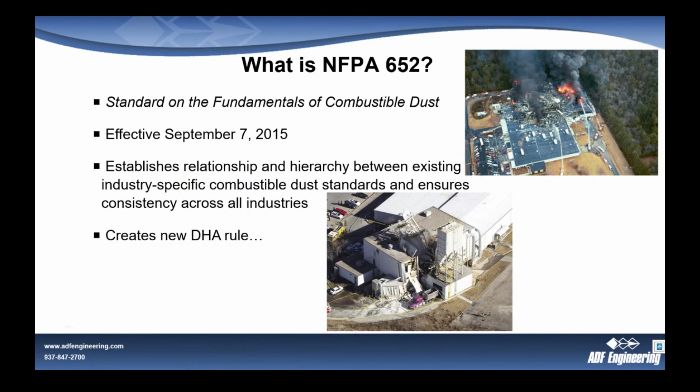OSHA has not formally adopted 652 as code. However, they did implement a national emphasis program back in 2007 that was targeted primarily at grain milling, but it has since been applied to other industries. It allows them to perform random inspections of facilities and implement heavy fines for non-compliance. The standard they've been following has been NFPA 652, and as was its intent, OSHA has in fact been issuing fines and citations, fairly sizable citations, for non-compliance with this regulation. Although they haven't adopted it as a code, they are using the general duty clause, which allows them to do that.

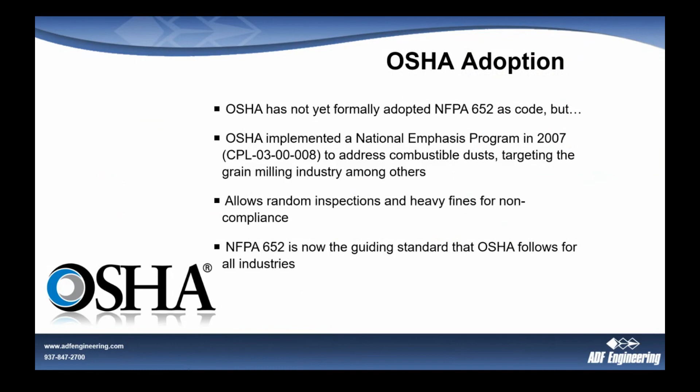So some of the key standards, particularly in the food and feed industries, NFPA 61 is what that industry has largely followed. That standard has since been modified to reflect back NFPA 652 and its requirements, and they've been consolidated somewhat. The other key standard, 654, is the catch-all standard for a variety of industries not covered under the other standards. 68 and 69 are two of the standards that involve sizing of equipment and requirements for explosion prevention systems.

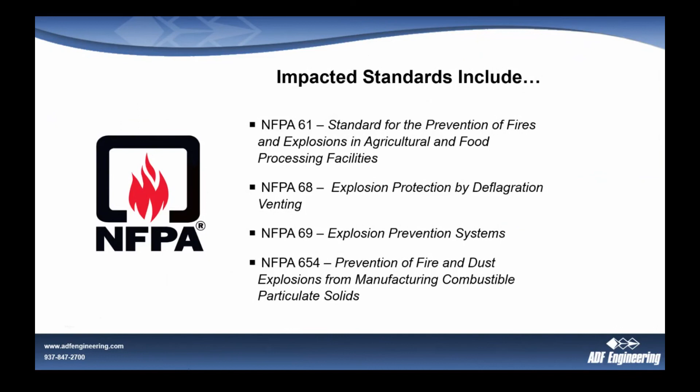So the dust hazard analysis, this is what's really new. What is a dust hazard analysis? This is similar to the process hazard analysis that was developed from OSHA's PSM program, which was found to be very successful. The regulations are intended to copy that success, and the DHA was developed with intent to be very similar to that process. However, there are quite a few differences, some fairly subtle. Once you start conducting a DHA, if you've been through a PHA, you can quickly tell where the differences are.

The key thing here is that this is required for all facilities that generate, process, handle, or store combustible dusts. That includes all grain elevators, corn milling plants, oil seed plants, but also plastics, places where combustible metals may be handled, such as a 3D printing facility dealing with metals. It also deals with woodworking facilities. So this is quite a comprehensive standard.

It is retroactive in the requirement for the DHA. So regardless of the age of your facility, you are required to have a DHA. Now keep in mind, a DHA is just the analysis. It is a document, not the implementation of that document. So other components may be grandfathered, but having the DHA is a requirement.

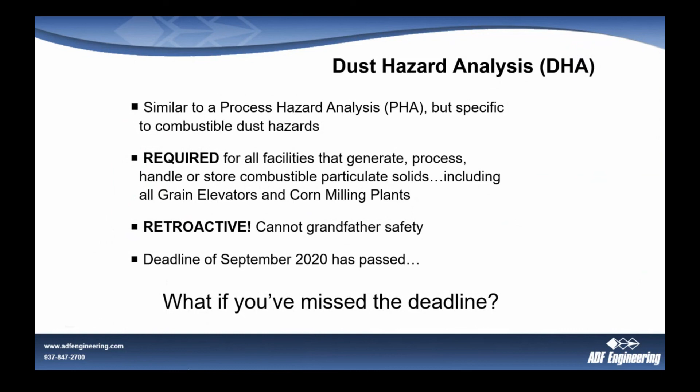This is the main concern. You still have time. You still need to develop that dust hazard analysis. Just keep in mind, if something happens in your facility that brings OSHA into your plant, or if OSHA decides to audit your facility for whatever reason, they can fine you. They can issue a citation now, and we have seen what they have issued in terms of citations — these can be significant. They will issue you a citation and essentially tell you to put together that dust hazard analysis. They will not necessarily shut down your plant unless they find an imminent concern, but they will cite you regardless.

So a dust hazard analysis includes combustible dust data for all of the combustible dusts that you have on your site. I'll be going through each one of these criteria and what they mean. You need to identify the potential areas of risk within your facility, identify the credible ignition sources, mechanisms for suspension of dusts, and safe operating ranges in your facility. What existing protection methods do you have in place today? Determination of the adequacy of that existing protection, and what explosion propagation hazards exist — that is, are there open paths from one piece of equipment to another where a dust explosion can spread. At the end of the DHA, you'll develop additional recommendations for protection, further measures for protection, and an implementation plan.

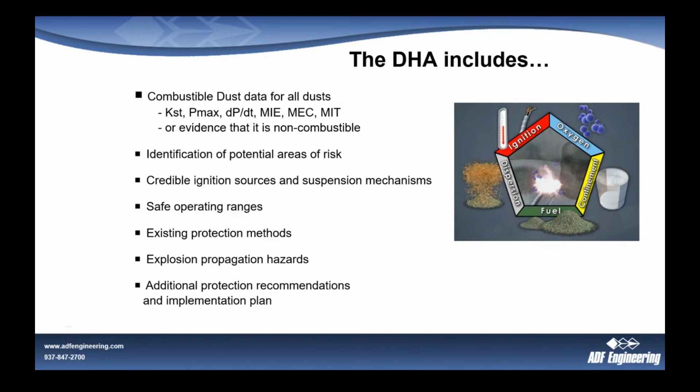So the first step in this process is to define what you have. NFPA 652 is very, very specific about this part. It's clear that you're required to understand what the hazards are in your facility, communicate that with operations, maintenance, and those located on the facility, and begin by defining the dust hazards that you have. Even if you don't believe you have combustible dust in your facility — and many dusts are not combustible, salts generally are not combustible, most minerals are not combustible — you still need to document that, and it still needs to be communicated.

But for the dusts that are combustible, and this generally applies to all organic dusts as well as most metal dusts, you need to define those dusts. You need to identify their sources, what types of dust you have, and focus on those primary hazards — the ones with smaller particle size and less moisture. That tends to lead to a more combustible material.

You need to do sampling and testing. If you are bringing in a raw material that is a combustible dust, your supplier is on the hook for providing you with the combustibility data for that material, unless you are changing it. As soon as you process that raw material, whether it's raw corn or soybeans or whatever it may be, if you are changing it, now it's your dust — it's no longer your supplier's dust. Once it is your dust, it is your responsibility to sample that, have it tested, and determine that combustibility data so that you can understand what the hazards are.

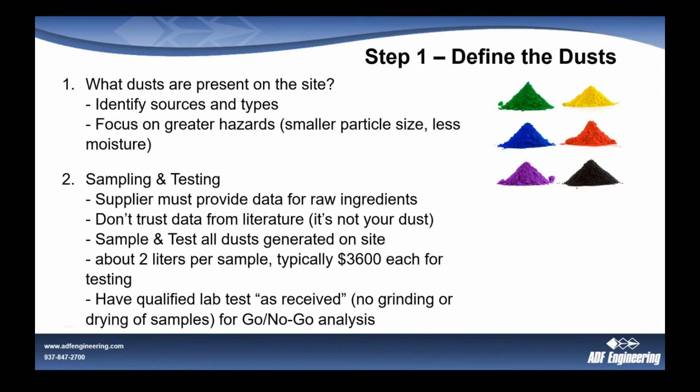But what you need to know is, is it combustible as you are handling it? So you need to do an initial go, no-go analysis. You may very well find out that the material as you're handling it isn't really a dust, so it will not propagate that explosion hazard.

The combustible dust data you get, if you don't specify otherwise, will include three components, these three criteria, the most well-known. Generally when you ask a supplier, is this dust combustible, can you give me your combustibility data, this is what they'll give you. They will give you a KST. They may give you a Pmax.

The KST is a calculated value based on the rate of pressure rise over a given volume. What it really means is the KST is the severity of the explosion that can be developed, how big of a boom does this material make. And Pmax is the maximum pressure that can be developed in an enclosed space over that period of time.

The KST determines the classification and therefore some of the specific requirements for your facility, for your specific dust. But the KST really doesn't paint the whole picture of the hazard. It is used, along with Pmax, in sizing some of that explosion protection equipment, in particular to determine the area of explosion vent panel sizing. Beyond that, that's really all that tells you.

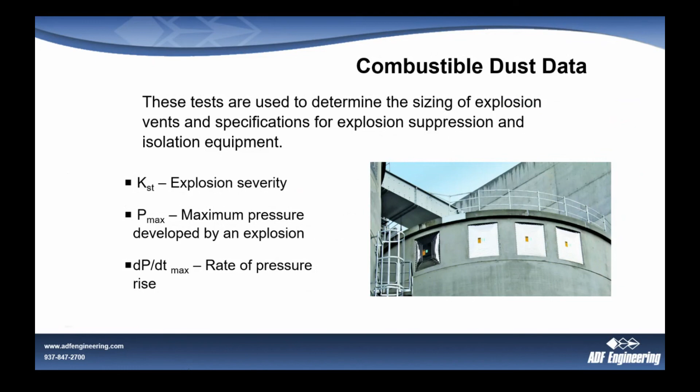There's some more information that you need to gather, so more you need to know. When you are testing your material, also ask for these things. MEC is the minimum explosible concentration. That's going to tell you how much dust is a hazard.

So if you just have a cup full of dust in a great big silo, is that going to be hazardous? Well, not really, because you're not going to be able to reach the minimum explosible concentration. There's just not enough fuel there.

MIE, however, minimum ignition energy, is the measure of the sensitivity of your dust. How easily does it ignite? This is really one of the most important criteria that you need to find out.

So if you only have a KST, you really, really need to get this value as well, the MIE, which in most facilities you'll need to have tested with inductance to determine the sensitivity of your material. This really tells you how easily things can go wrong.

So here's a case where the lower it is, the worse it is. You want a higher number. When you go below 50 millijoules, that means your dust can be ignited by a static spark, from brush static, from equipment, if things are not properly grounded.

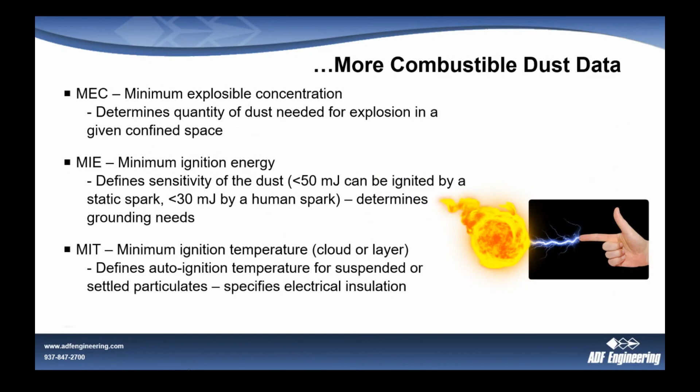So step 2, once you have your combustibility data and you understand how sensitive your dust is, how big of an explosion it can make, the next step is to outline the hazards. This is where you're putting together the DHA itself.

The first thing you need to do is define the nodes for each system. A node is just an area where dust may exist, may be generated, or may leak. Define all of those nodes in your system that contain combustible dusts, and that may include the room itself, where accumulations of dust are occurring.

You need to identify the free paths of travel from one area to the next, and especially identify those areas where your dust can get outside of the equipment, or where an explosion could travel beyond the equipment. A very common area you will come across would be through blowers or fans.

So, for example, in a pneumatic conveying system, when you're running it, the hazard is fairly light, especially if it's a dilute phase pneumatic system, because the amount of material is generally below that minimum explosible concentration. But as you're shutting that system down, it becomes an issue of concern in that transition period when you're starting it up or shutting it down.

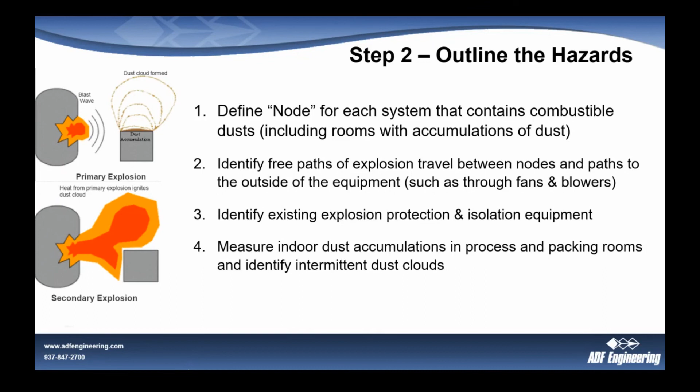As you conduct the DHA, the participants need to include representation from operations, from maintenance, site engineering, and of course site safety needs to be involved as well, along with someone who offers some expertise in this area of combustible dusts. So you need to have that competent person available during this thing.

Review each node for the likelihood, the potential for ignition sources, and so on. Document the recommendations for mitigation of potential explosions and their potential to spread to secondary explosions.

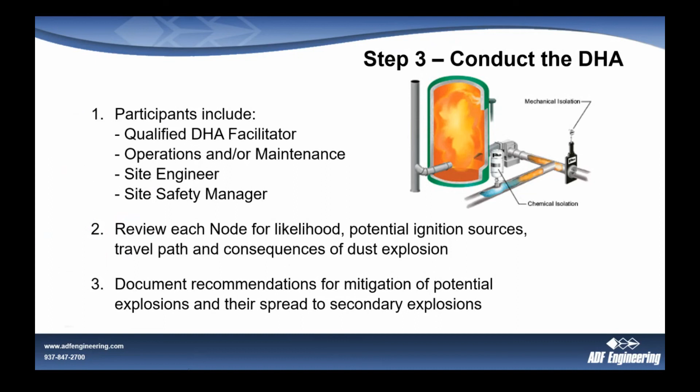Here is just an example. I know this is an eye chart that probably none of you can read. That's okay - this is just to demonstrate what a typical dust hazard analysis chart looks like as we're assembling it.

The key thing there is that central column, which is the likelihood. If you're familiar with running PHAs, you typically have 3 columns: severity, likelihood, and detectability. However, what you find in a dust hazard analysis is that your severity and your detectability will wash out - it's the same hazard you're looking at again and again.

It really boils down to the likelihood of obtaining all 5 parts of the explosion pentagon that could be developed into an explosion. So that becomes the key criteria.

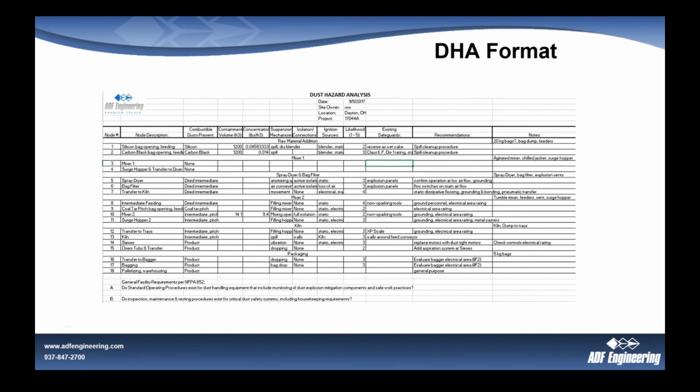In the next step, the implementation plan, you need to develop a written plan to address your combustible dust risks. That needs to have a schedule and a responsible person. That is what OSHA is looking for.

They want to know that after you've conducted your DHA, what is your plan? When are you going to execute it? And who is responsible for it? That's what they're going to hold you to. Once you have a DHA, it's this implementation plan with schedule and responsibility that they hold you accountable for.

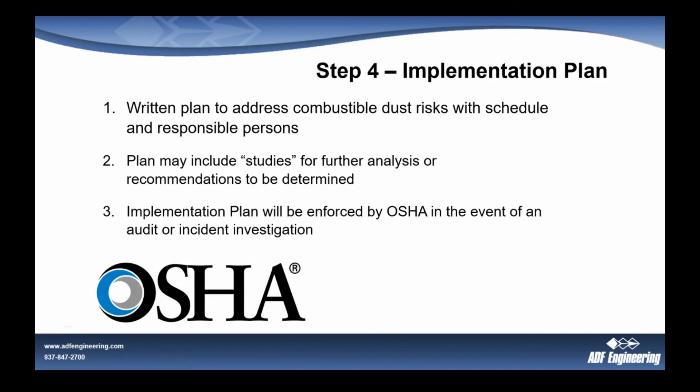That plan, however, may include further studies. You don't have to solve all of the world's problems while conducting your DHA. You may opt to say we will evaluate this further, or we will do a study, but you still need to have a schedule to conduct that study. You need to have a person responsible to go and do that additional study, that additional evaluation. But that is what is then enforced.

As you develop an implementation strategy for an existing facility, you need to do this engineering review. This is where you need to have an engineer involved to look at those high-risk areas and help you come up with the best options for compliance, because there's almost always more than one way that you can implement this kind of redesign. Some ways may be easier to run than others, but others may be lower capital. Typically you're looking for the least expensive option from a capital standpoint.

That's not always the best option, but those things need to be weighed against each other. One key thing is that you'll find, for example, explosion relief pressure, known as Pred, can be reduced by combining a few options. Sometimes you need to look at the combination of things like explosion venting and suppression, which are generally implemented one or the other, but there you can have that combination. So there may be some lower cost options that can be engineered.

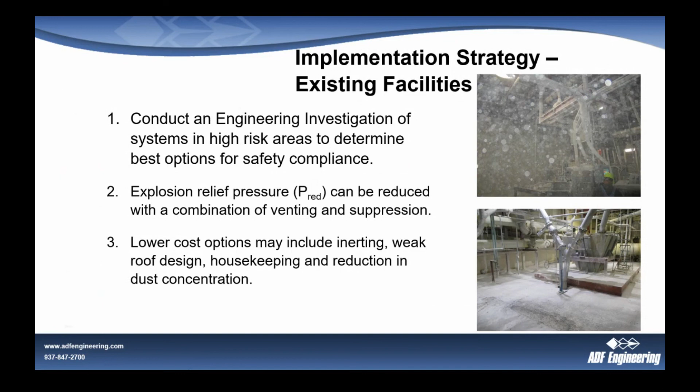Because it's these accumulations that become the large secondary explosions. When something happens inside of a piece of equipment, it reaches this pile of material that gets raised into the air by the first explosion, becomes a devastating secondary explosion, which knocks down the walls and brings down the roof. You can't allow that to happen.

So in the final step of this, you need to implement your solutions. NFPA 69 is very valuable for this. There's a lot of information about what you can and cannot do in NFPA 69, but it does allow quite a bit of flexibility as well. It outlines a number of options that you may have.

Typical solutions, of course, include chemical suppression and explosion venting - that's what you see in the pictures here. I will say this, don't be afraid of chemical suppression. It is something that many facilities are just hesitant to implement because the first one that you install is going to come with a control system. The first one will be fairly expensive compared to the rest. So once you've got one, you might as well start putting in more because it's fairly inexpensive then to add on to that.

Explosion venting is perfectly fine especially when your equipment is outside and not in an occupied area. But if your equipment, say a dust collector, is inside or in the middle of the room, explosion venting becomes prohibitive very quickly because you have to be able to vent that outside the room. And you can't do that if your dust collector is located in the middle of the room.

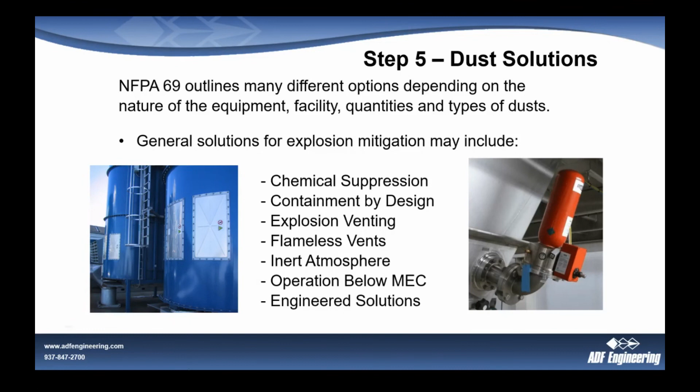So there are many low-cost solutions that can be implemented. If you are outside, something you'll often see is an explosion panel that is directed to an occupied area. To protect that, you can either relocate the dust collector, relocate the panel to another side of the dust collector, or simply add a deflector, which is a fairly simple solution to protect personnel from a dust collector that is outdoors. Indoors, this is still not the way to go. You need to vent that outside.

Make sure that your ductwork is not oversized, and this is another common issue when you're designing a facility, when you think, oh, we're going to design it for future capacity and make our ducts enormous so we can increase our airflow in the future to double the capacity. And then that duct is just too big for your current operating rate. What happens is that dust will begin to accumulate within the ductwork, and now that creates a new hazard.

So other things you can do, passive and chemical isolation, of course, very commonly implemented. And as I mentioned, moving air intakes away from personnel.

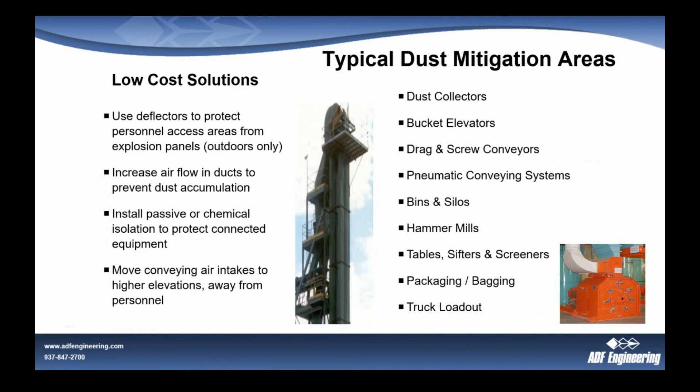Truck loadout is notoriously difficult to maintain dust levels. When you're filling the top of an open top truck and dropping material a fair distance, 8-10 feet of free fall of large quantities of dust into a truck, it can make enormous dust clouds. And what's right in front of that truck but a big hot piece of equipment that runs that truck, the cab, the motor itself. So you need to be very, very careful. And guess what? There's often people there.

First, among dust solutions, we need to talk about isolation. As you know, the secondary explosions are the big ones. The way to avoid those secondary explosions is to keep the sources away from where those secondary accumulations tend to be. If you have an incident in a dust collector, which tends to happen, dust collectors are where these incidents tend to begin. When for whatever reason a small spark hits your dust collector, the dust collector's got everything it needs and it's just waiting on that spark to arrive. Once that spark gets there, you have an explosion in the dust collector. If you can contain it to your dust collector, you will likely be okay. You will lose your dust collector, but you can't allow that to go on to all of the sources feeding that dust collector, because that's when the problems happen.

So you are required to isolate this type of equipment. This applies to dust collectors, bucket elevators, grinders and mills. You need to isolate these. Most often, this is passive isolation around a dust collector. Passive isolation is usually a flap valve that will lock in place once it's activated. A flap valve is essentially a big check valve, that's really all it is. And it's fairly straightforward.

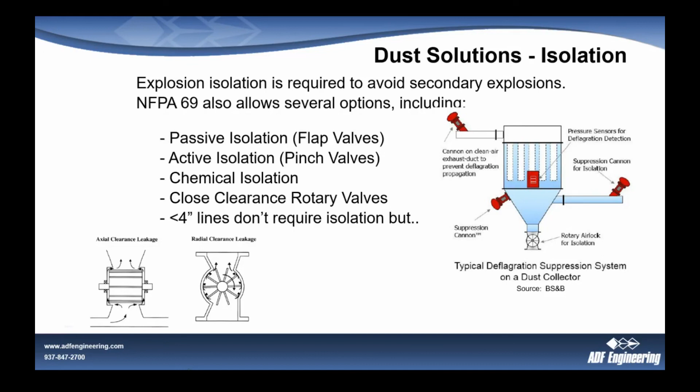Dust collectors in particular are the big area of concern, and this is where OSHA is going to pay attention. They're going to say, take me to your dust collectors. And if they see a central vacuum system collector in the middle of your operating floor, and it doesn't have explosion panels on it, or it's not isolated, and it's larger than 8 cubic feet, guess what? You're going to face a citation.

Ideally, your dust collectors should be located outside. That's because these things tend to blow up and you don't want it in the middle of your room. They're often on the roof. They need to be isolated from their sources because at the other end of that dust collector is a station with an open port where you're drawing the dust in to protect an operator, but that can be the hazard to the operator if an explosion's coming in the other direction. So you need to isolate that, whether it be passive or active. You need to isolate it from its discharge.

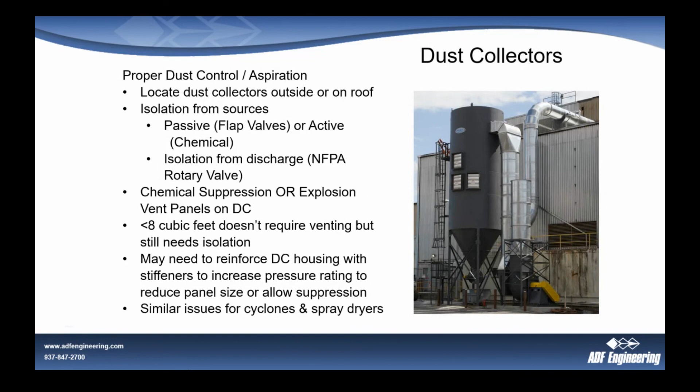Bucket elevators, this is the other big area. You do not have to aspirate every bucket elevator. If you're dealing with certain larger raw materials like corn, you do not necessarily have to aspirate your bucket elevator, but it is still a good idea. If you're handling something like soybean meal, yes, you need to aspirate that piece of equipment.

The best places to put that aspiration, generally you'll need something up at the head section, which is the top, and the boot section down at the bottom. Often the best place to do that for the boot is usually a little bit up, about 3 meters or so from the actual boot. You need to isolate your bucket elevator upstream and downstream, just like with the dust collector. You need to monitor the temperatures. The key thing you're watching for in a bucket elevator is keeping it from overheating. If it overheats, you can set off that explosion.

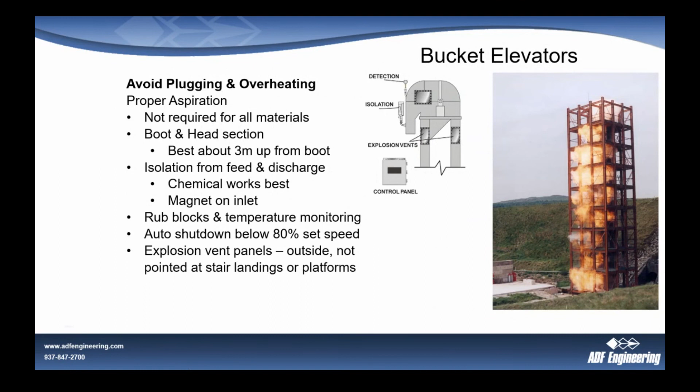They need to shut down if you go below 80% of the set speed of that equipment. The vent panels go generally along the side walls on the top of the bucket elevator, along the upper half generally. Make sure that your vent panels are not pointed at stair landings or platforms. We see that all the time, and OSHA does not like it.

Bins and silos, there's been a lot of discussion amongst the dust safety people in recent months about bins and silos. This is where a lot of incidents continue to occur. Usually the head space in a large silo is too big for suppression to be effective. Aspiration is ineffective. These things, especially concrete silos, don't support the addition of explosion vents. So they're generally designed with weak roofs.

But then to feed those silos, what do you end up doing? You put conveyors on top and people walk around up there. Well, that's no longer an effective emergency vent if someone's standing on it, or if there's conveyors up there. So you need to limit the access to these areas. You need to keep the roof area clean. That's very, very important.

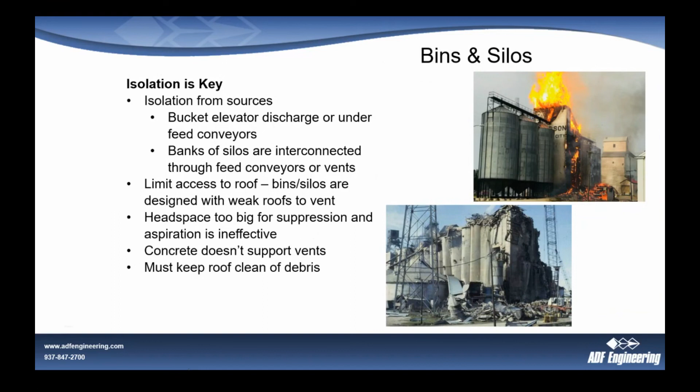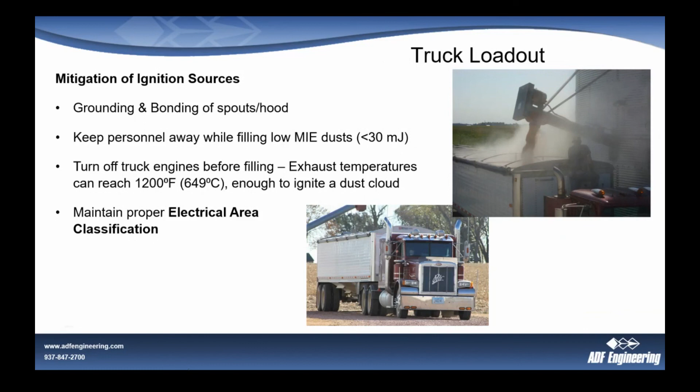Truck loadout, as I've mentioned, is very, very difficult. Make sure you're grounding and bonding the equipment. Keep people away if you're filling a low MIE material. Watch the electrical area classification in the truck loadout area. Make sure the engine is off, because the exhaust pipes of your truck can reach temperatures of 1200 degrees, more than enough to ignite a dust cloud.

There are some nice spout designs out there that you might want to take a look at. The dust-controlled loading spout from Salina Vortex - they make an excellent one.

That's the one with the stacked cups on the right, or the dust suppression hopper from Sioux City Steel, as you see on the left. It's very effective as long as you're loading out the same thing again and again. If you have any variation at all, those tend not to work.

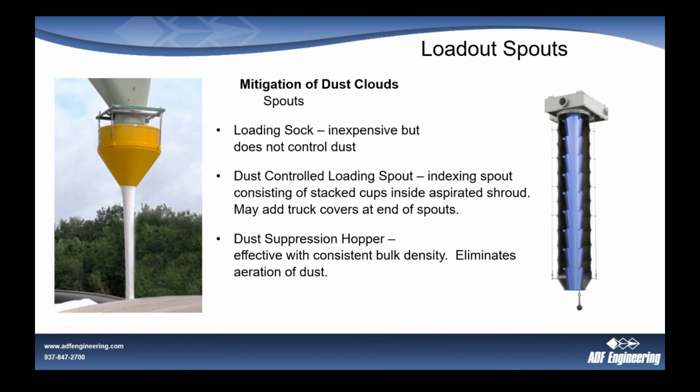Loadout hoods, this is something we do a lot of work with, in particular at ADF. The key thing here is to make sure you're not trying to move your truck, because if you're trying to move it to fill the front and back without multiple spouts, you're really never going to effectively reduce dust accumulation in this area.

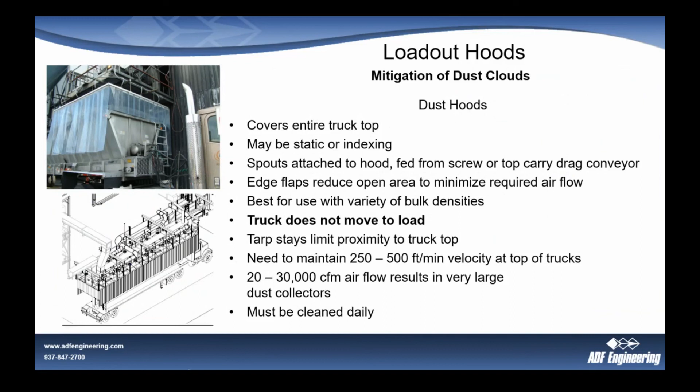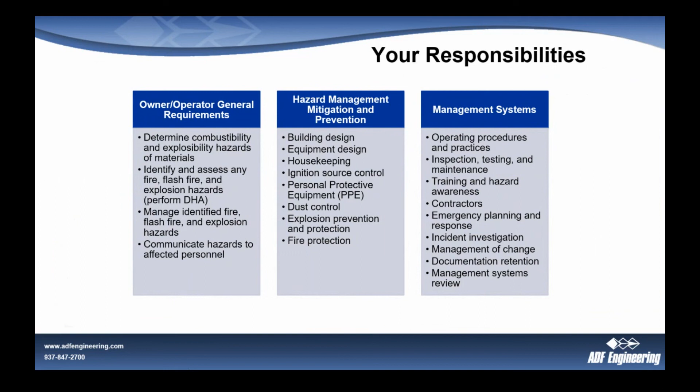Your responsibilities as an owner: identify your hazards, design your equipment so that it mitigates these hazards, have proper housekeeping, isolation of equipment, and maintain this ongoing. Once you have a DHA, it's also your responsibility to maintain it. If you change your system, you have to change your DHA, updating it just like you do with a PHA under PSM.

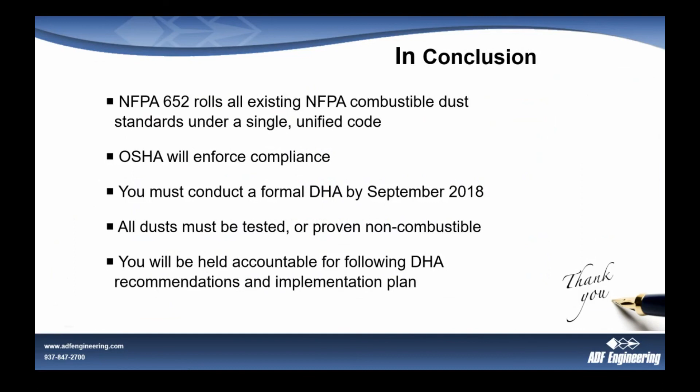So in conclusion, NFPA 652 is meant to cover all combustible dusts under a single unified code. OSHA is enforcing compliance; we've come in behind OSHA on a number of companies that have been cited. Your formal DHA deadline was September, and you've missed that date, so you need to do that now. All dust needs to be tested or proven non-combustible, and you will be held accountable for the implementation plan.

So with that, if there are any questions, I know I've run maybe a little long.